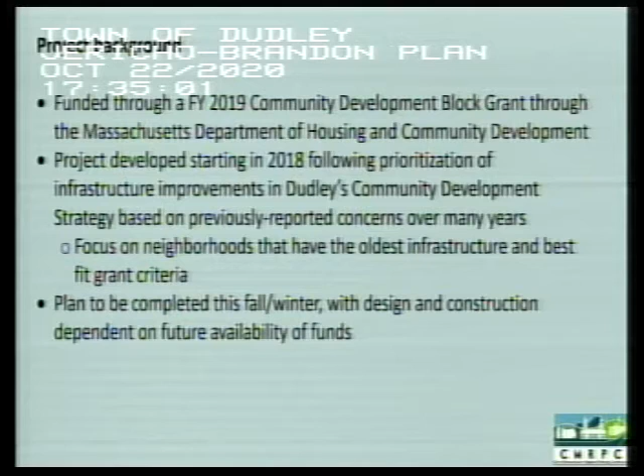You'll be able to view them there, and we will be accepting comments by email as well over the next couple of weeks. So just diving into the project here, this is a Town of Dudley project that's funded through an FY 2019 Community Development Block Grant from the Massachusetts Department of Housing and Community Development. The Planning Commission's role here is really to just help administer the project on the town's behalf. So as I referenced, the project developed starting in 2018 following prioritization within Dudley's community development strategy, which is a part of this particular grant program. So the idea under the community development strategy was to focus our efforts on neighborhoods that have the oldest infrastructure in town and that best fit this particular program's grant criteria.

That means they have to be primarily residential areas, they have to be at least medium density, and they have to have a moderate or lower average income level. So that's really what brought us to focus on these particular parts of town. And as I think everybody in town is aware, those are some of the earliest developed parts of town that have the most substantial infrastructure that is in need of study and possibly replacement in some cases.

So Tighe and Bond's team and their sub-consultants have been out in the field since early in the summer and into the fall doing a field survey. The idea is that the plan itself resulting from the field work will be completed this fall or into the early part of the winter, and any design or construction projects that come out of this planning effort would be dependent on future funding availability.

The goal of the project is to provide a roadmap for short and medium-term infrastructure improvements within this project area in the Jericho neighborhood and the Brandon Road and vicinity area.

To achieve that goal, we've split the project into three phases. The first is to evaluate existing infrastructure systems in the area. The second is to develop conceptual designs for improvements in key areas. The final step is to produce a plan with prioritized and phased recommendations for improvements.

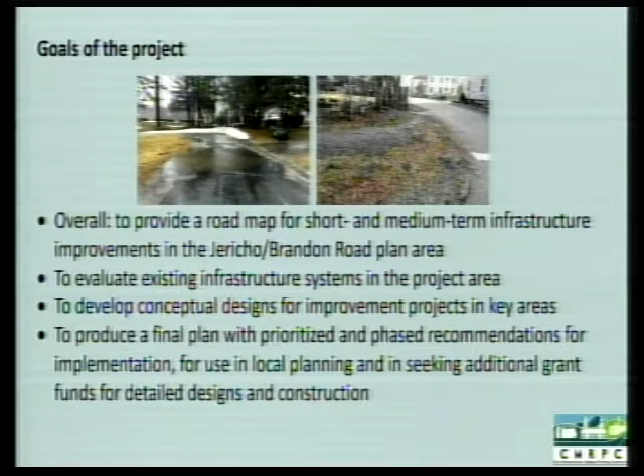The goals of tonight's forum are pretty straightforward. First is to introduce the project to neighborhood residents, property owners, and other stakeholders, to present the findings that Tighe & Bond's engineers have found in the field over the summer and into the early fall, and to give residents and property owners a chance to provide local input.

I should also note that this is the first of two public events for this project. We haven't quite set the form for the second one. It may be part of another body's meeting, like the Board of Selectmen, Planning Board, or Water and Sewer Commissioners, but there will be another opportunity for public involvement later in the project.

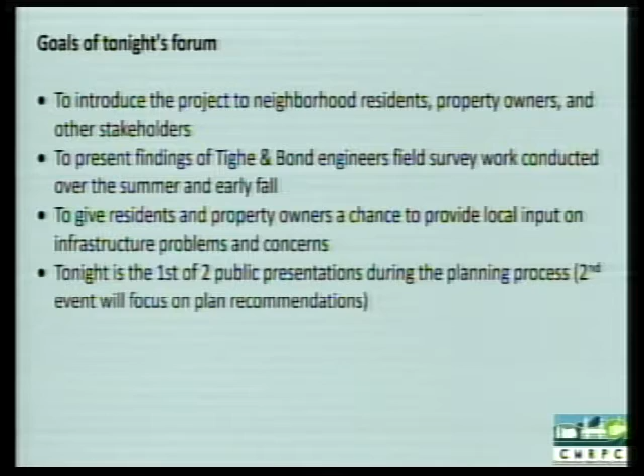I'm Matt Zork with Tighe & Bond. I'm a project manager, and this is Liz Desjardins. We've both been working on this project since the middle of summer. We're just going to walk you through what we found so far and what we've done to date.

As Andrew mentioned, we'll lay out what we've found and hopefully get some input from the town on whether you agree with what we found so far, or if there are problem areas we haven't identified that we should look at or reevaluate. The main goal is to get feedback from the town and make sure we have a realistic approach on what we're looking to upgrade.

What we've done to date is we first started with an aerial survey of the whole project area. It was mapped, and then we had a ground crew go out and collect field data of inverts, structures, and any surface elevations or structures they could find. They did a lot of record research on water, sewer, gas, and electric, and compiled it all into one base map that we can use as a tool for future design as well.

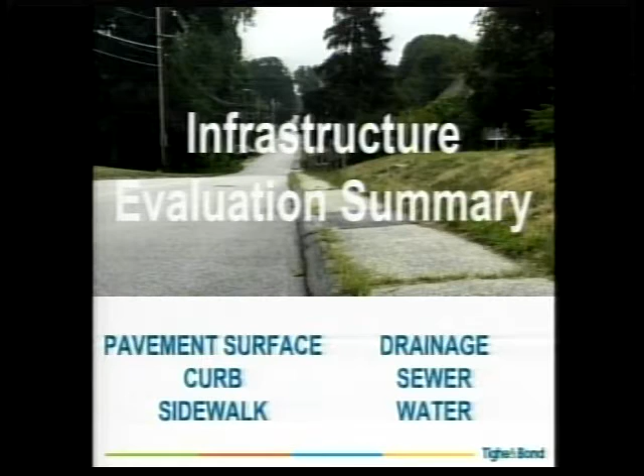We'll look at maps to see what the general rating is for each category, and then I'll give you some specific concerns that we have observed or that the town has brought to us so far, so you know what we already know.

We'll start with pavement surfaces, which is roadway and parking lot. The only parking lot in the study area is off of Pine Street, the one by the basketball court.

Pavement surfaces were rated based on what we observed visually, things like pavement patches, which you can see in the good photo, cracking, observed in the fair photo, and lack of pavement, like that pothole in the poor photo, as well as things we can't see in photos, like rutting or heaving. These are all photos from the study area representing the different categories we used.

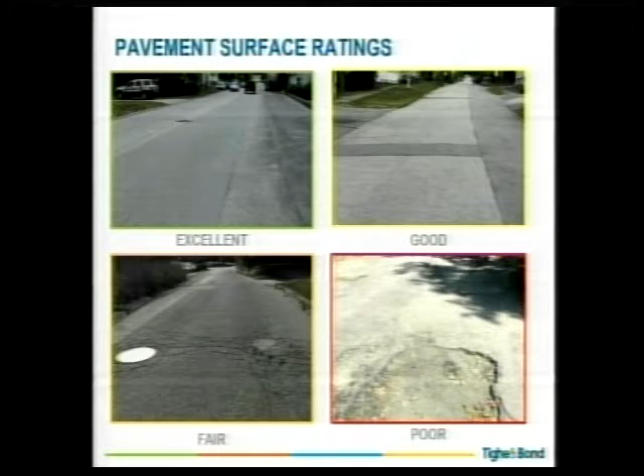This will be true for all the figures you'll see. For the Jericho area, the excellent rating you see towards the north is Pine Street, and running down, that is Mill Street.

In general, all of the tables shown tonight include the entire project area, so the table is for the Brandon and Jericho area combined. For example, this pavement condition table shows a pretty even distribution of ratings between excellent and fair, and that one parking lot on Pine Street is in good condition.

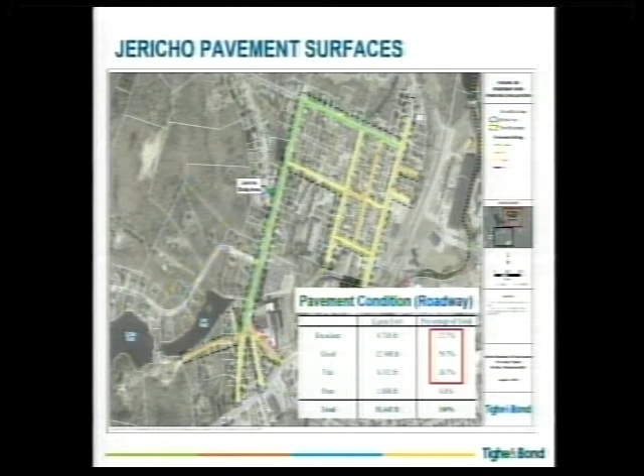Specifically, some of the areas we found to be in poor condition, or that we have a concern about, is the Donna Lane area.

Didn't expect that. All right, it gave us 15 minutes.

On those roads we have a lot of cracking, uneven pavement, exposed subsurface, and a generally degrading roadway. Over on Williams Street, we can see heaving of some of the manholes there, and cracking associated with that.

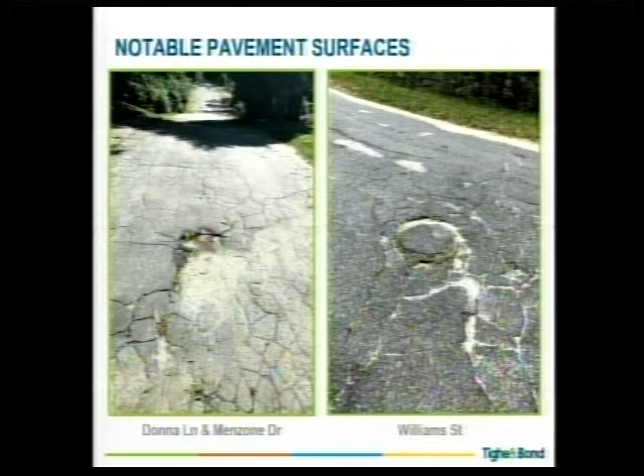Moving on to our next surface feature, curbs. Curbs were observed for cracking, settlement, material, general condition, and reveal height. A typical curb reveal height is 6 inches. In the study area, we observed reveal heights anywhere from 6 inches to almost flush with the street surface.

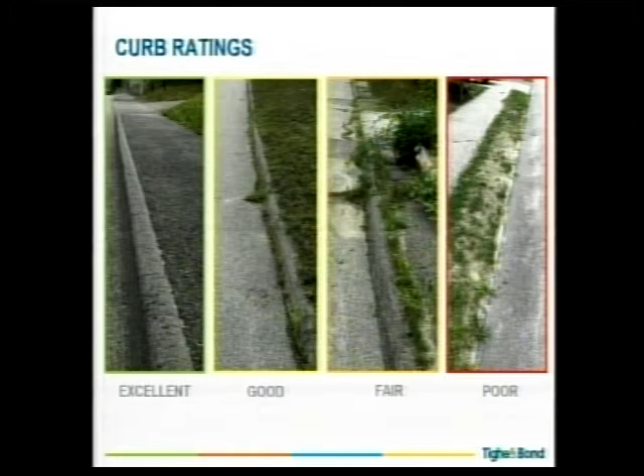Again, these are some photos from around the study area, and we see almost a brand new curb in our excellent category down to a curb that is almost non-existent at this point in the poor category.

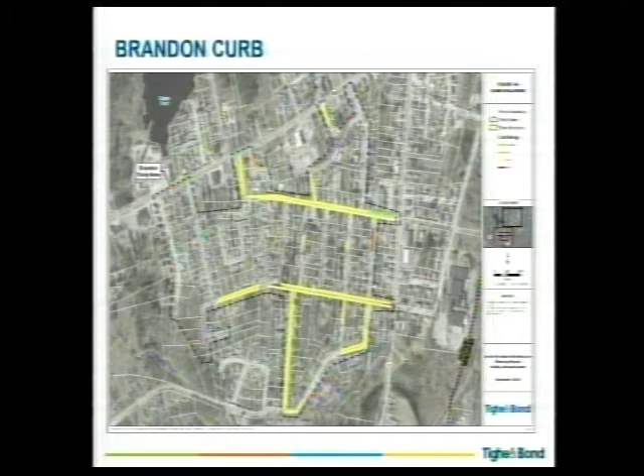Curbs throughout the area are mostly bituminous concrete, though we do see some granite curbing. In the Brandon area, granite curbing is only near the library with that newer construction. Besides that, a lot of the curbing that exists in that area is good. In the Jericho area, granite curbing runs along Oxford Ave.

Unlike the Brandon area, in Jericho most streets do in fact have curbing. However, we see some of the poorer conditions on curbing in this area. But overall, we have over 50% of curb that exists in good condition.

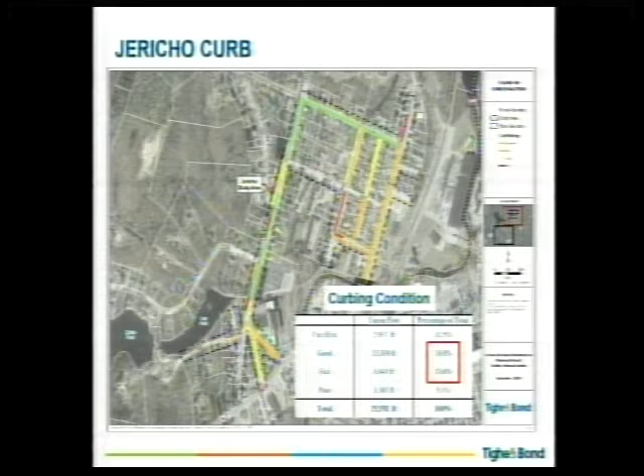So that brings us to one of the concerns about curbing: where it doesn't exist or where it is in such poor condition that it has almost crumbled away. In those areas where we do not have curbing, the biggest concern is where we're starting to see erosion. In some areas, the side of the roadway is eroding from the constant stormwater flow and lack of curb. You can see the list of some of the streets where this was observed. The top photo is on View Street.

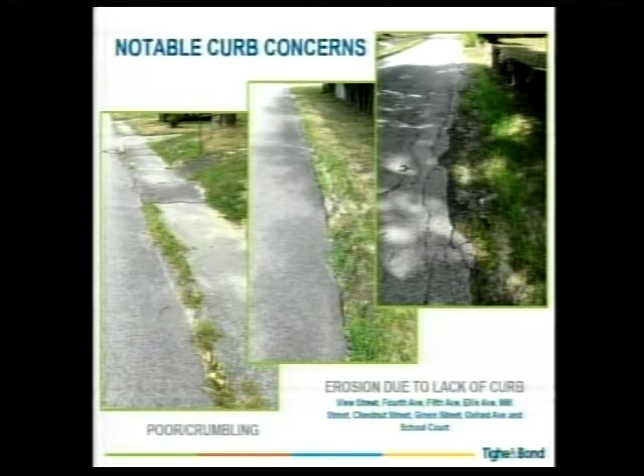Our last surface feature that we looked at was sidewalks. For sidewalks, again, we were looking for cracking, settlement, and also general walkability. What goes into general walkability is ADA compliance, mostly with ramps. Also evident walking hazards, which you can think of as an obstacle in the sidewalk. This might be something you can trip on, like a root, or vegetation that prevents you from actually passing the sidewalk. Also crosswalks, or the lack of crosswalks.

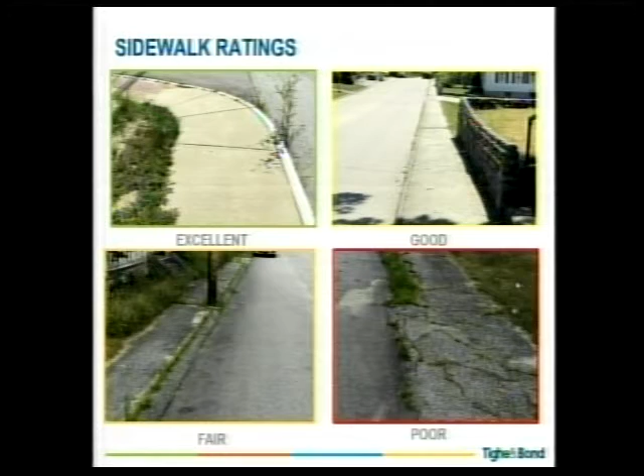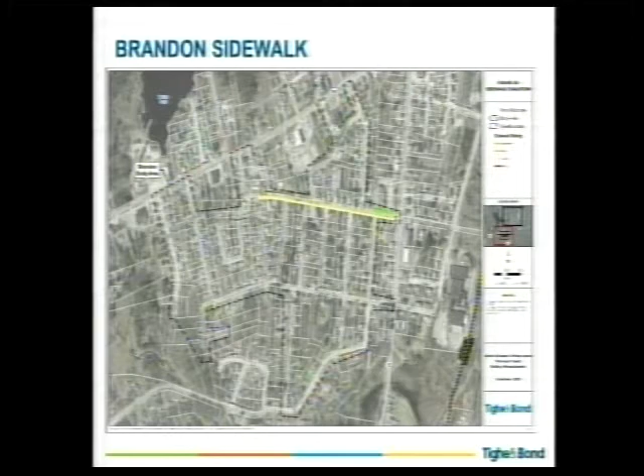This is the Brandon figure again, and we have mostly bituminous concrete sidewalks, with concrete sidewalks in the same areas that granite curbing is in. We don't need to spend much time on this figure because there's very little sidewalk in the Brandon area. Most of our sidewalk is in the Jericho neighborhood. However, most of it is difficult to walk on. Even when we were conducting this study in that area, I spent a lot of time walking on the road, and I observed others doing the same, just because it is hard to walk along that area.

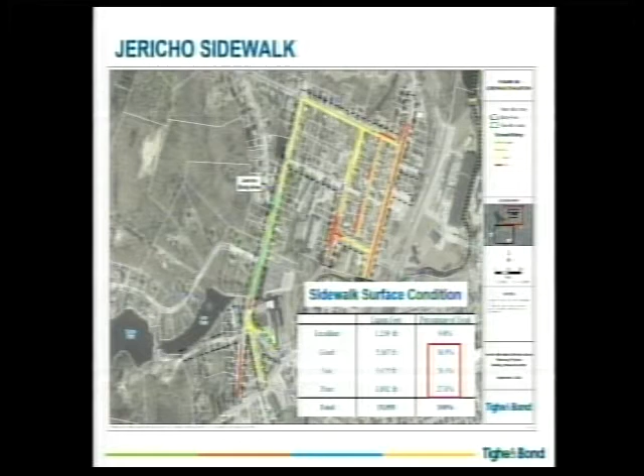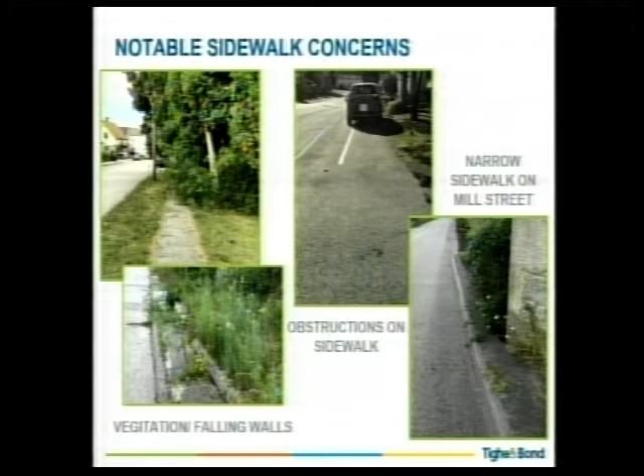So moving on to our underground utilities, starting with drainage. For drainage, we visually observed all of the structures with the help of town staff. The structures include both drainage manholes and catch basins. All of them that were able to be opened were opened and looked in. We rated these structures on general stability of the structure and the materials it's made of, the effectiveness of it, and the frame and cover or frame and grate condition.

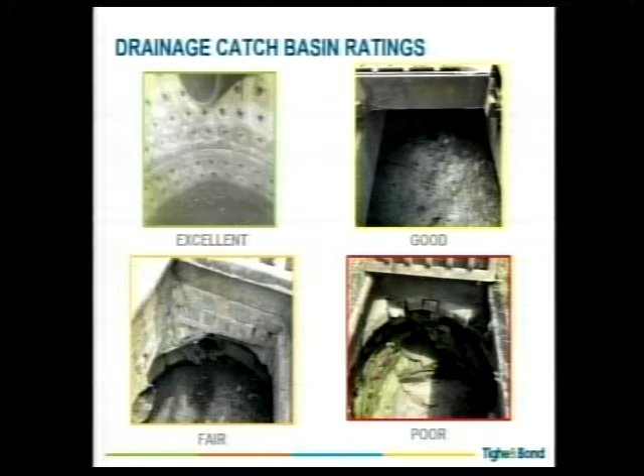The piping of all of our underground utilities, as Matt had mentioned before, is mostly dictated by the year that it was installed. That is true for our drainage, and basically anything over 75 years of age is considered poor condition. Most of the drainage was installed in the early 1900s, so you will see a lot of the piping rated as poor. A lot of that piping is corrugated metal pipe. Our structures are primarily brick, some concrete block, and very few precast structures. The town has expressed much concern with stormwater issues that they have experienced.

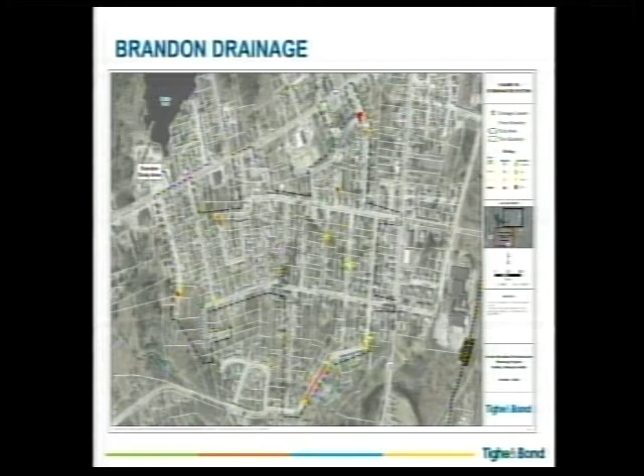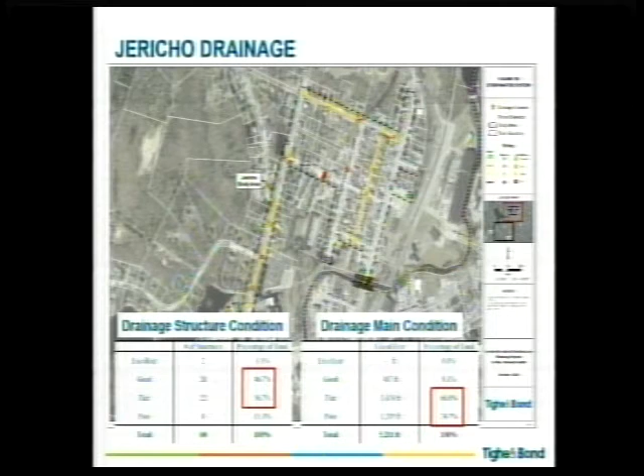Again, we're looking at the Jericho area here, with a little bit more drainage infrastructure than the Brandon area. Although we see that the structure conditions are good to fair, what really dictates how the stormwater system is going to properly work is the piping, which we see over 60% is fair. The main concern with drainage is not even the drainage that is in place, but the lack of drainage, especially in the Brandon area. Right now that stormwater mostly just becomes a concentrated flow down Brandon, which I'm sure some of you have witnessed.

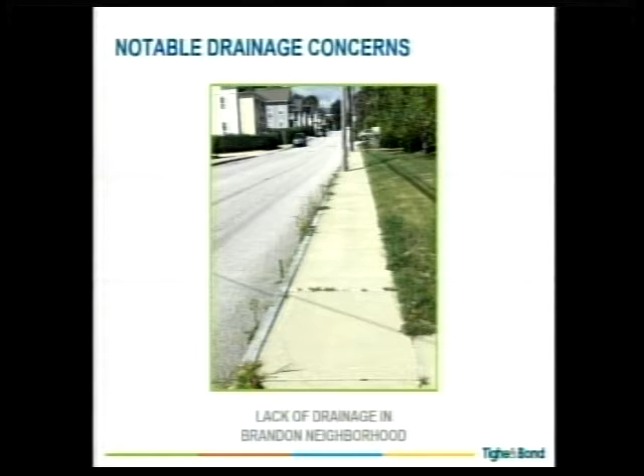And much like the drainage, for the sewer, we opened all of the structures with the help of the town, and they are rated again on the stability of the structure, things that might indicate infiltration, such as roots. If roots can enter the structure, then that probably means water can as well. And then also the cover and that cover's connection to the structure.

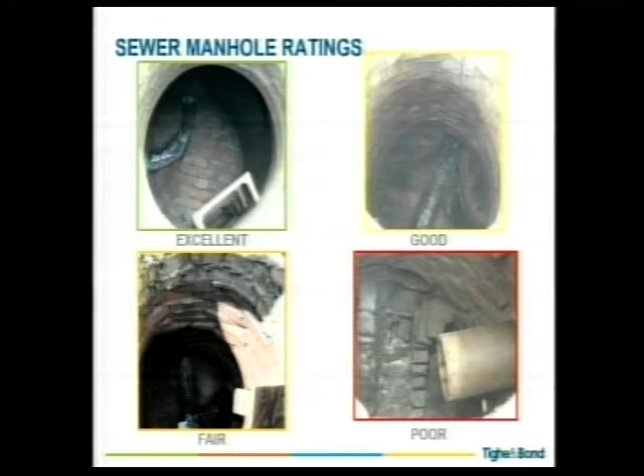And the pipes, the main lines of the sewer, are based on age, with that same 75 years or older rated as a poor condition. Most of the pipe, per the records that could be found or knowledge from those who are familiar with the sewer system, indicate that most of the piping, and from what we can see at inverts, is clay pipe with some asbestos piping scattered around. And the pipes do change sometimes in between manholes. And we see the sewer ranging from anywhere from 50 to 120 years old.

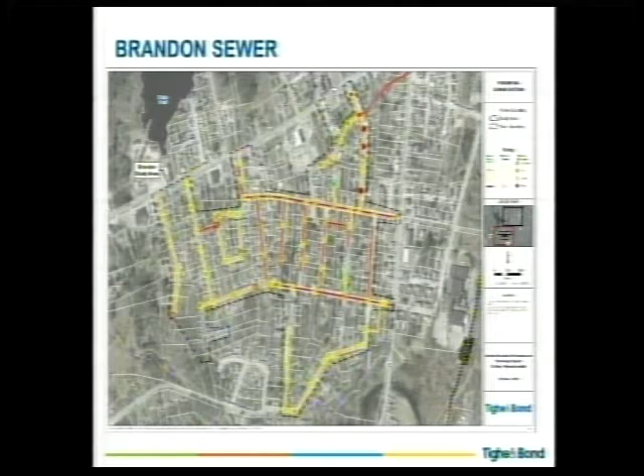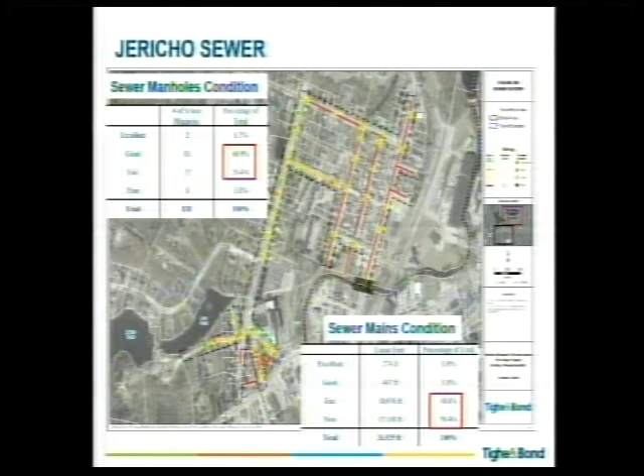And one of the biggest concerns from the sewer staff is the sewer that runs through private properties. There's quite a bit in this area, but specifically down here between Ardlock and Village. And there are quite a few regular backups in this area. I was lucky enough to find one of the manholes backed up, so I can say that is true. And the staff expressed concern and issues they've had with accessing, repairing, and maintaining that sewer through all of that private property.

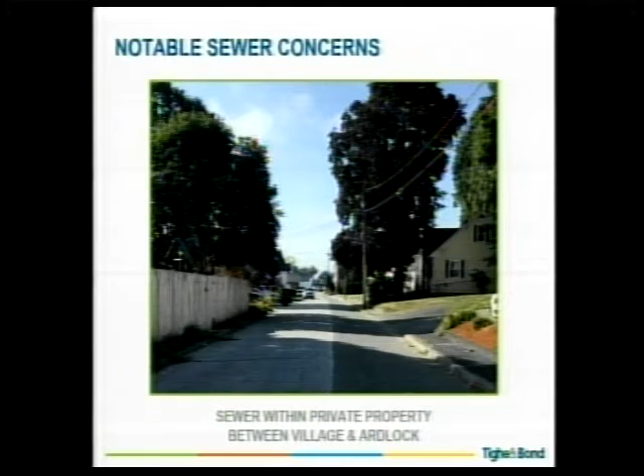And Liz, before you go on, just one thing to add on the sewer. We didn't have time before this meeting to complete our TV inspections. So again, most of this is rated on age or known undersized pipe diameters. But we will have a few days to actually TV some lines that are suspect to supplement this data and figure out where some service ties are, or if there's other problem areas that we know of. So that'll be coming too, which is not incorporated into this presentation at this point. Yes. And we can focus some of those efforts on the areas of greater concern or further development.

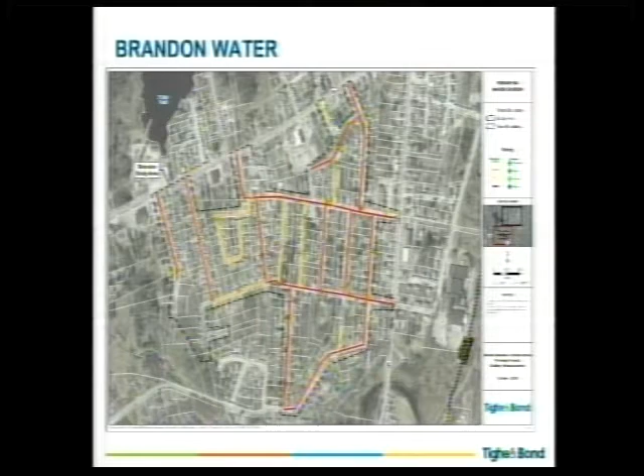However, most of the fire hydrants seem to be either upgraded or installed later on after this initial water piping installation. So most of the fire hydrants are of the same model and in good condition. There are two excellent rated water lines. Those are the newer 12-inch water lines that run down Pine Street and Mill Street. And as you can see, we are at almost 70% poor condition for water based on material and age of that water infrastructure.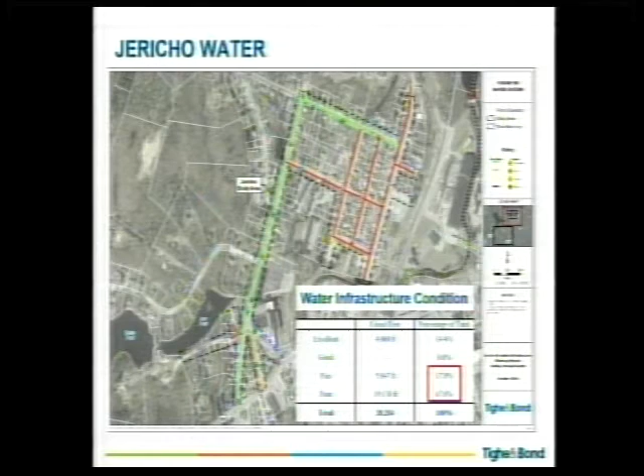And talking to the water department, the biggest concern they really have right now is Oxford Ave. That is a 6-inch pipe that runs to service Oxford Ave, and that is mostly a high residential area, a lot of apartments, services a lot of people, and that capacity and stability of that pipe is really a big concern for the water department.

So with that, that is a summary of some of our infrastructure in general, and the reason why these areas were chosen is the infrastructure is definitely aging or aged in this area, and a lot of it finds itself in poor condition. So we have made our observations. We've got recommendations and concerns from the town, but we also want to hear from residents and stakeholders on what you've observed and experienced. And if there's any questions, please let us know.

Yeah, and just to add on to that too, today is to get some feedback from the town and make sure everyone agrees on where the figures stand and the improvements. The next step is to make recommendations on what areas to prioritize and where we go from here once we have all this data. So that's the next phase of this, which Andrew was alluding to for the next hearing. So just wanted to go over that again.

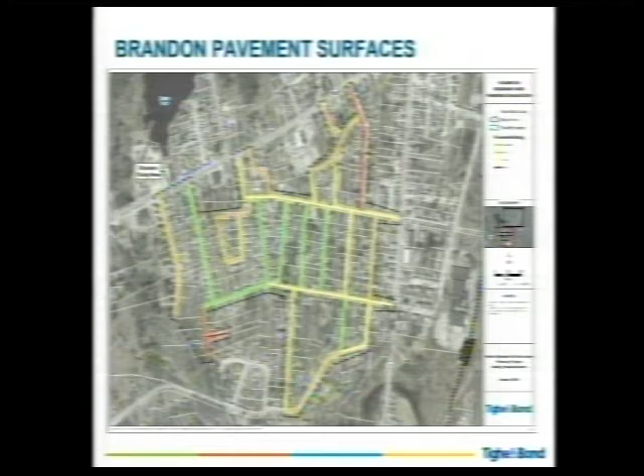We're also doing that up in the courthouse area on Dudley Hill. Right here. That's pavement, yep. But this is where we have some of the CCTV from that infiltration, pretty extensively. But that's a good example where we may look for supplemental funding to take the cost of repairing that critical line off of the water and sewer users. That would certainly help. If we prioritize accordingly, that would be a perfect opportunity to do that.

We also have been working with Tighe and Bond engineers on a small bridge program for the stream that goes under Mill Street and through the Stevens Mill. So we had submitted a grant application to the DOT for the small bridge program. We haven't heard whether it's been funded yet, but that's another poorly rated bridge that the town has that we're looking to renovate, which would be applicable to the study as well.

Yeah, I think the tricky part is just the timing on all this. I'm just trying to combine whatever the timeframes are on the other studies, if they align with this one. Our schedule, due to this grant funding for the study part, is what, end of December, January? The grant that's funding this project expires the end of December, although I've just heard from the state that they're issuing an automatic extension through March. Okay. So I don't think we would need that much time, but we do have a little bit more of a buffer if we need it to wrap things up.